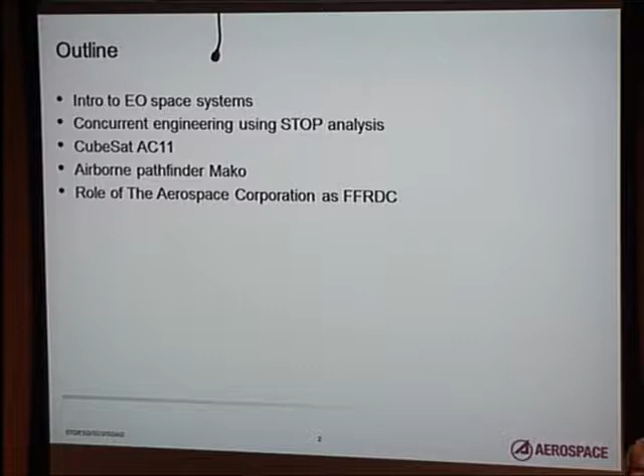And so quite a few charts. I had warned Dr. Hart that I have 51 charts. Some will be more dense than others. They're more for reference if people are reading along as they're listening to me. So feel free to ask me questions throughout the presentation.

So today I will be covering what it means to have EO space systems, what are those things that we're worried about as engineers in optical design, and then I'll go over the concurrent engineering environment and using something called STOP analysis, which is structural thermal optical performance. I'll go into CubeSat design of a system we're doing at Aerospace called AC-11, and I know people have heard that that's the new trend, trying to do smaller satellites and be able to test technologies earlier on, to then bit them into Class A satellites. And then we'll also talk about airborne pathfinders.

In addition to using a CubeSat platform, one can learn a lot about future technology and interesting optical advances using airborne systems, and we'll go over some of those principles associated with that. And then finally, based on the request from Dr. Hart as part of the colloquium to expand what one could do in a career, I'm going to talk a little bit about what it's like to be part of a federally funded research and development center. It's not always a common term people know about or a possible career opportunity, so I wanted to speak a little bit about that at the end.

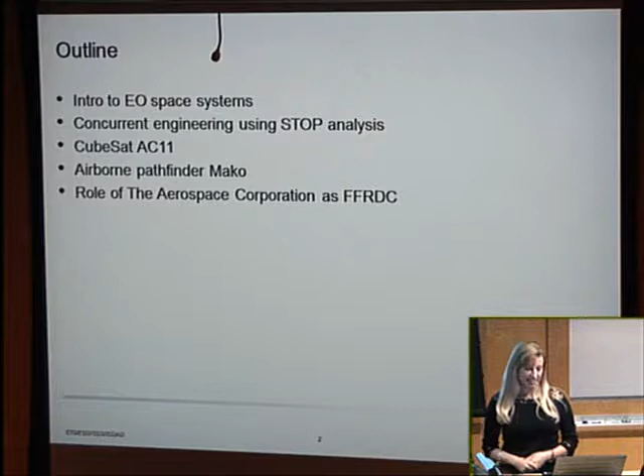So in terms of the role of an engineer, an optical engineer in EO systems, it's changing a little bit. When you leave school and go forward into the real world, there's a lot you have to worry about when it comes to a space system. It's a little bit more complicated, more things to be concerned about. So as you see here, we have to work in more interdisciplinary ways. It's more than just optical design. We have to look at integrating and testing a system for space, and I'll go into what that is all about. And also, the space optical system design process itself has become less stovepiped.

Traditionally, early on, when space became one of the things we were reaching for in the early 60s, things were relatively stovepiped. So an optical engineer would design something, pass it to the mechanical engineer, and then that would go on to thermal analysis. But now, things are becoming more collaborative, and the responsibilities are blending a little bit more.

So optical designers need to see the big picture to know that the choices we're making for a design will not negatively impact other areas of a system. Part of what I look for when I work with a team is, can that optical engineer be knowledgeable in other disciplines, at least know what not to do? Maybe not necessarily how to solve the problem, but some of those red flags so we can successfully make good choices for the other design engineers on our team.

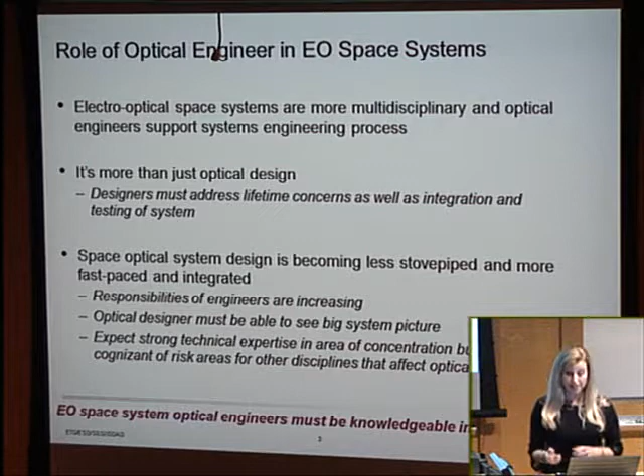So space. We hear about it, and if we don't work it all the time, we don't know what the concerns are. We see beautiful radiation belts, and lots of things happen up there to our systems. So we need to, for example, worry about the longevity of the materials we choose. Is there degradation in the performance? Those are the things we consider as designers.

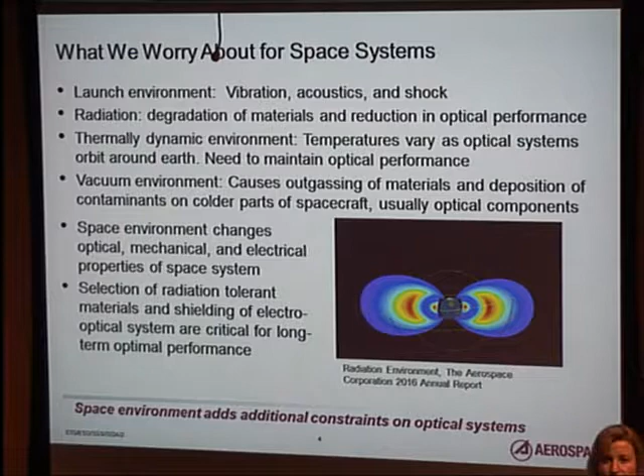But in addition, it's once we're up there, but we have to get there first. So the launch environment can be very detrimental to systems. So when we are on Earth, we test those systems in integration and testing, where we model the vibration, acoustics, and shock environments that these systems are going to experience before going on orbit.

Now, radiation, that's the part that causes some problems for our optics, especially if there's darkening, or if the materials that are enveloping the spacecraft start degrading, then the thermal effects could start affecting performance as well.

So the thermally dynamic environment, as this particular satellite or other object is going through orbit, you're going to see a lot of temperature cycling. And so then, depending on when imaging is taking place or what the mission of this particular system is, you're going to have to be able to maintain that optical performance in this dynamic environment. That's where part of this concurrent engineering helps to resolve some of those challenges of working with various disciplines.

Again, the selection of materials that are radiation tolerant and the shielding will enable us to design optical systems that have a longer lifetime. And the whole point here is that space just adds additional constraints on what we need to do.

So traditional systems engineering is an aspect of pretty much everybody inside of industry. We have this classic systems engineering V, which tells you about the life cycle of a system. We'll be going through on the left side, looking at requirements, understanding what is the goal of our system, and then as we go up, the upper part of the V is where we're starting to build and verify that what we designed will actually perform on orbit. So this is what we would term the systems engineering V.

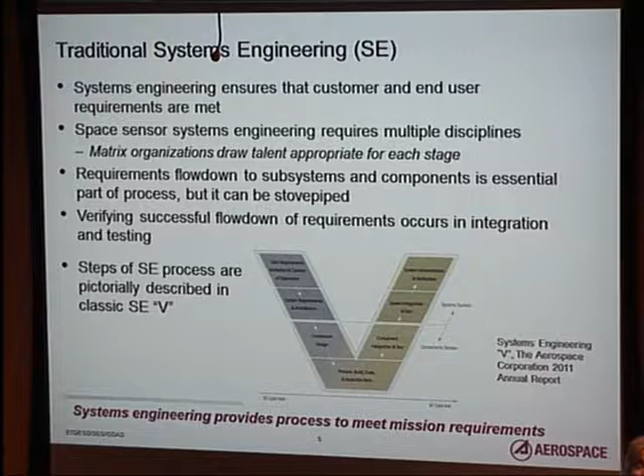And because of this, the requirements in general have to be across the system, and sometimes they are stovepiped, but as things are trending now, we're really trying to make sure that the requirements are more complementary to each other. And again, we verify that successful flow down of requirements in integration and testing.

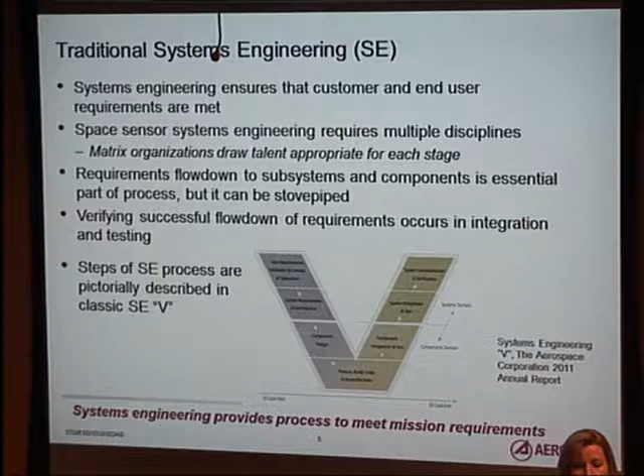So now there's something new happening. It's a trend that's occurring within the aerospace industry, not Aerospace Corporation only, but the industry itself. And this is actually a very positive change where it is now becoming concurrent engineering. And here we look at the mission performance, and at the same time we're able to model on a platform what all of the different parameters from the different disciplines working together.

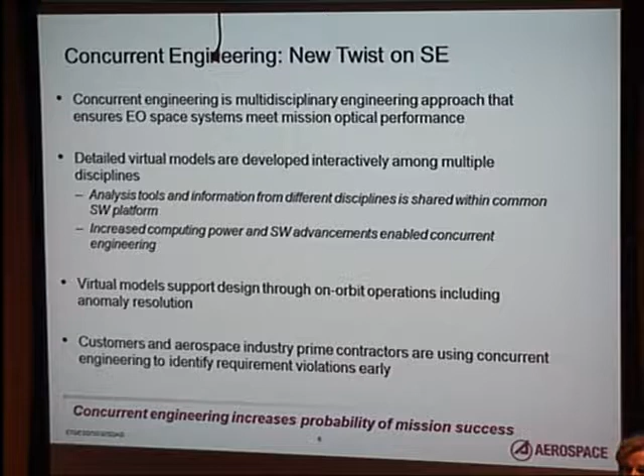So we have engineers working in their very familiar softwares, for example, CODE V and Nastran, Thermal Desktop, passing parameters on a platform that, in our case, is a software called Comet. There are many others commercially available and also ones that people develop in-house. This allows us to share this information and evaluate that performance before anything even goes into testing. And this is really only now possible because of computing power and software advancements.

These virtual models become an important tool because in previous times, we'd have an engineering model that we would build with some critical components, and then the full flight model. If there were problems in testing, one would only be able to use this engineering model, which had approximations of performance, or maybe not the same components but close enough. We'd have to do anomaly resolution with a system that wasn't the perfect one we're actually putting on orbit or currently testing.

By having these virtual models, you have the identical component outline and layout of the CAD and all of those performance characteristics in this concurrent engineering environment, where you're able to actually simulate what you're seeing in a test or even on orbit when there's a problem. So it's a really great opportunity to know your system really well and be able to evaluate it.

So this is a great strength because we're able to decipher problems much faster. As I said, as an industry as a whole, we're seeing a lot of contractors moving towards this type of design.

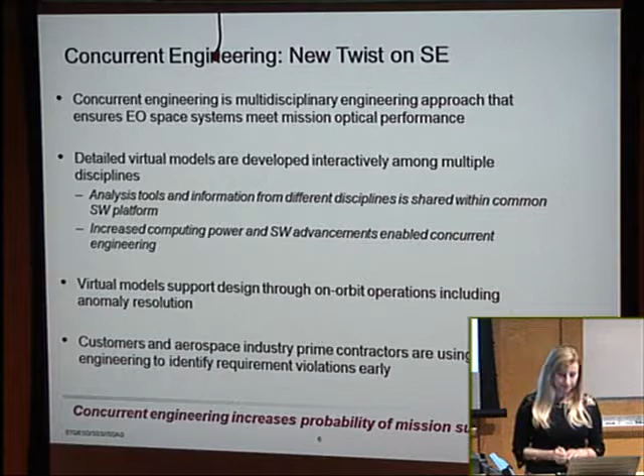So in terms of integration and test that I mentioned before, the point of it is to verify and simulate the environment that this particular system would see through the launch to on-orbit performance.

So we have thermal ovens to bake out contaminants prior to integration of these particular components. We're also able to do optical testing pre- and post-environments, and depending on the value of the asset, we're sometimes able to do this type of optical evaluation within a thermal vacuum chamber.

But the goal of all of this is to also exercise all the critical deployments of a system. So as we list here, solar arrays, optical covers, telescope booms - all of these things are evaluated to make sure that they perform properly.

And of course, the thermal vacuum environment creates the ability to test any outgassing or any kind of darkening that might happen on an optical system. Vibration tables, of course, simulate the launch environment. And shock, which is critical also, is that separation from the launch vehicle.

And the whole goal here is that the integration and test process should be catching those problems before we're on orbit.

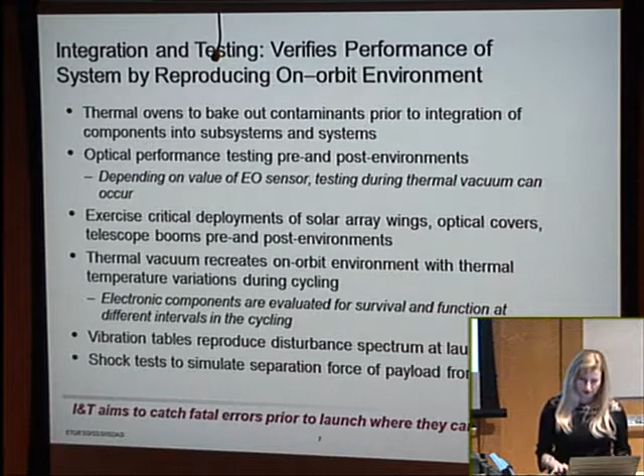So now I'll talk a little bit more about this structural thermal optical performance. STOP modeling, again, is more of the as-built, detailed representation of the hardware. And the goal is to really look at that optical performance change due to effects on the structure and the thermal components.

And again, this is an opportunity for engineers to work together in the same room and pass information not just through the databases that exist, but also be able to be close by to discuss the issues and find ways to make sure that those requirements actually close.

So what's really great about this is that we're actually learning from each other, and so our optical experts can learn more about the mechanical concerns. So the next time we design something, we're a little bit smarter and we're able to be more effective in how we create our designs.

And one benefit also about this is that we're able to follow a sensor throughout its development. We're able to evaluate a quick schematic and a quick design. We're able to analyze and validate any existing design changes. And then, of course, predict any on-orbit performance problems.

And once something is on orbit, we're able to even assist in anomaly resolution. So again, the STOP modeling is something that is able to support a system throughout its lifetime.

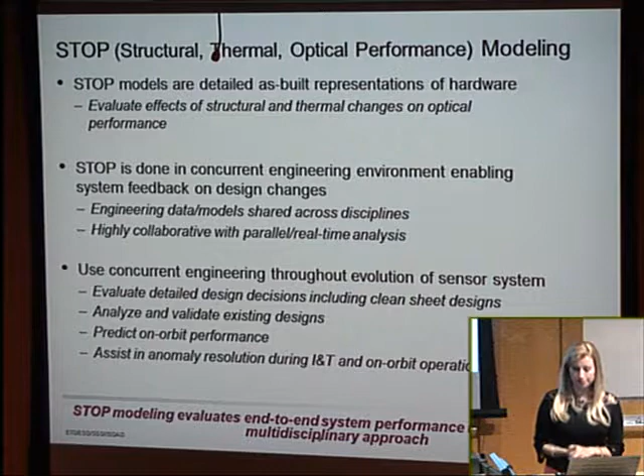Lots of stuff here, but again, it's an iterative model. As I mentioned, people would work in a Code V or Thermal Desktop, and we create meshes and ways to represent and put onto this CAD, for example, the information that's relevant for the system performance.

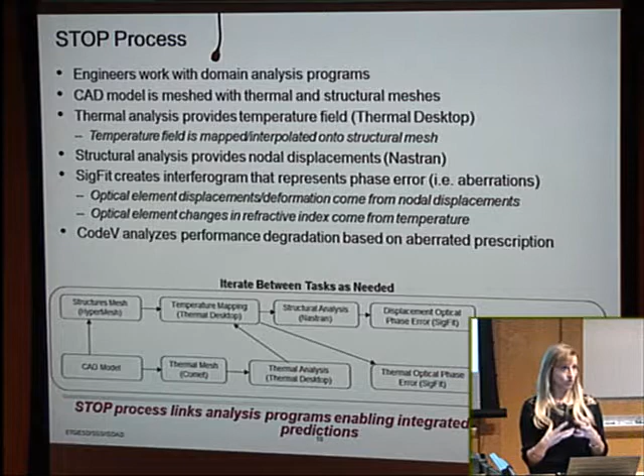And as we're growing this model and as the design changes occur, we're able to augment the model and improve it. And then we just go through and are able to do predictions on the optical performance.

So the purpose of STOP analysis for the Aerospace Corporation is a little bit different than maybe at a standard contractor. The reason for this is that our job as a federally funded research and development center is to be the technical advisor to the particular customer paying for the work.

So our job is to actually be able to provide feedback on the status of a contract, areas of risk. So we perform independent analysis of a contractor design. We support preliminary design reviews and critical design reviews, where we provide feedback on what is necessary to change so that the design closes and meets end user performance requirements.

And then also, as things are developing at a contractor, from a CDR to actually cutting metal and creating the optical component, we're able to support factory testing. And again, part of that is the anomaly resolution portion.

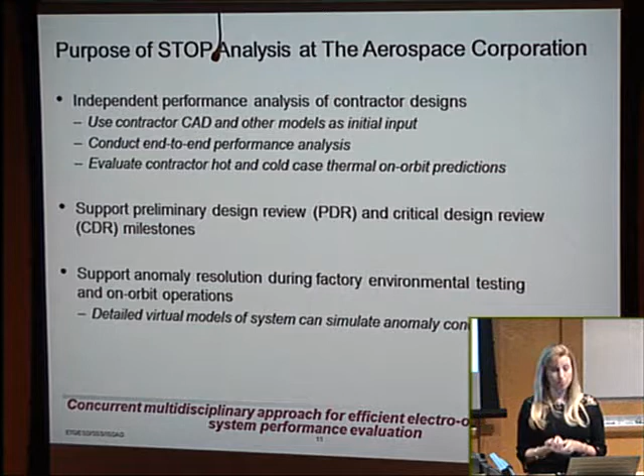This is the life cycle of a system. We have the pre-conceptual design phase, preliminary design, and final design and build and test. We've supported all the blue areas, but not flight anomaly resolution yet, which is actually good right now since that's based on a lens focus anomaly resolution I'll discuss shortly. We came up with an anomaly resolution plan that's working successfully. But if there were other complications with this system, we'd be able to assist in improving performance.

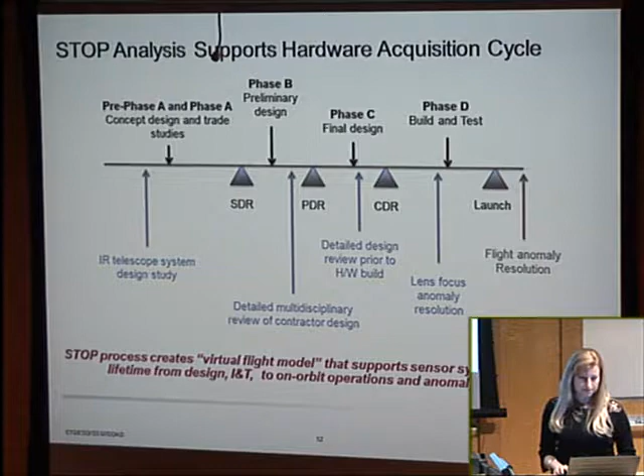This is a virtual flight model, which is what STOP analysis allows us to have. This first example shows a quick analysis of a design to see what area of risk we'd identify, and what could be the biggest problem for this particular telescope.

As we went through, we noticed there was a need for a sunshade based on thermal performance, and expansion from the titanium mounting ring and primary mirror. We were able to locate, as this person was developing the design, that the highest area of risk was in that particular region. This was a much less complicated system than we normally model, but it was an initial design, and we could tell the customer where to look and what to redesign. It was a short duration study, but it provided high value information that may not have been found in a stovepiped process for designing an optical system.

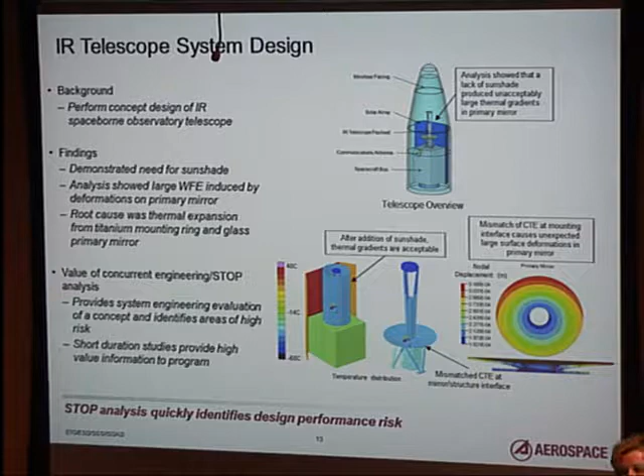The next example is more complicated because it's an actual flight system in thermal vacuum. The performance showed a large gradient across the system that was not expected. We took the models we had and simulated the results happening in thermal vacuum, so we could set up the conditions that would result in such a thermal distribution.

It turned out the heater design was not implemented properly on this sensor, and it was too small to equally heat the large front end of the system and the back end. But we were able to come up with a thermal control loop that would upload thermal values to help control the system.

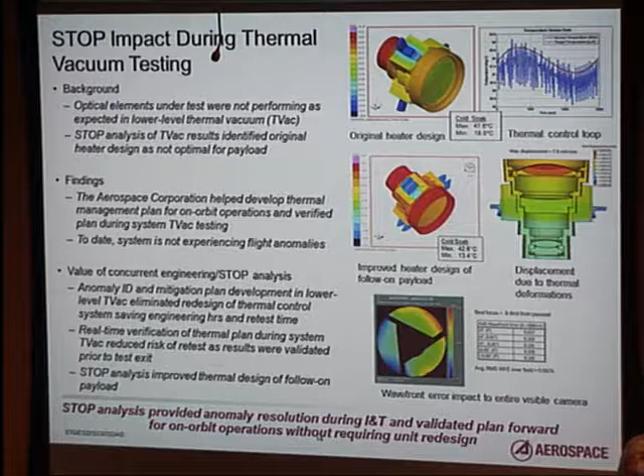The good news was they were able to continue and meet their schedule, because unfortunately in the real world we're not always able to do the ideal solution. We may have a launch date and have to go, so we come up with something workable. We helped them meet schedule without pulling out for thermal vacuum testing, which is very expensive, especially with a standing army of engineers. At the same time, we were able to help improve the next generation of the sensor. Everything being iterative in engineering, we made an impact on the immediate system and improved future systems. This was one of our big show-stopping moments.

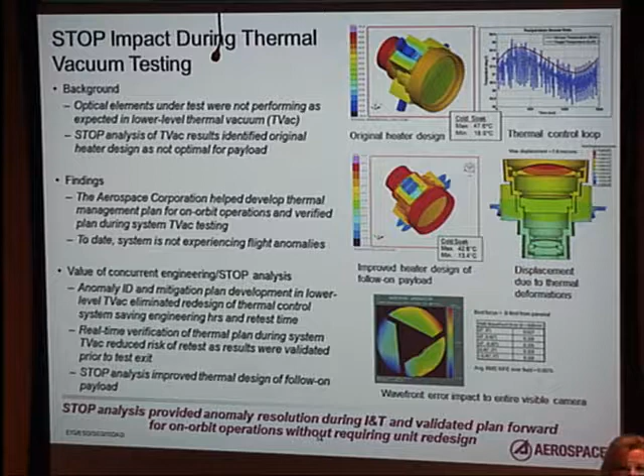We do have other examples, but they're on other topics, so we will not go over those.

Next, I'd like to talk a little about CubeSats. CubeSats are becoming more popular, as you know. They're a much less expensive way to access space. They also provide a great platform for university students to design experiments and systems that operate in space. Also, a lot of customers are considering breaking down Class A satellites into smaller ones, so we're able to break individual performance requirements into sub-satellites. This also helps because we could do redundancy a little bit easier.

If one part went out, we could send up another smaller satellite faster, because the timeline for a Class A satellite can be up to a decade from design to launch. So that's quite a while. Sometimes by the time you launch it, a lot of the components have already evolved further, but it's too late to include them in a next design. So CubeSats allow us to put the latest technology into space, verify how it works, and then include them into future systems. So they're able to support a disaggregation of a Class A satellite system, but also support improvements of technology for future Class A satellites.

So I sort of went over that here. Also, the benefit of a CubeSat is it is standardized. They are standardized in U units. As you see here, they're 10 centimeter by 10 centimeter by 10 centimeter. It allows people to be able to purchase inexpensive buses to support such systems. You can buy them online, or from vendors that sell CubeSat launches.

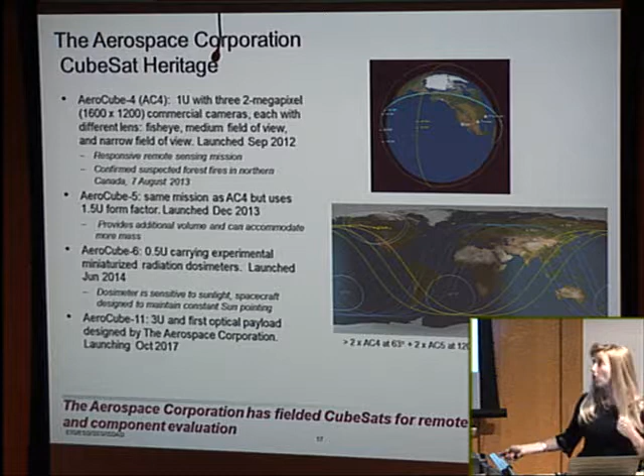So I would like to specifically talk about AeroCube 11. This is actually Aerospace's first optical payload on a CubeSat. We've done others, as you've seen, but they haven't been optical payloads we've designed. This is the first one.

So part of an optical engineer is to also be efficient with cost. One of the considerations we had was, well, if we're using a CubeSat, it's very common to use off-the-shelf components, commercial off-the-shelf, called COTS. So we wanted to investigate that.

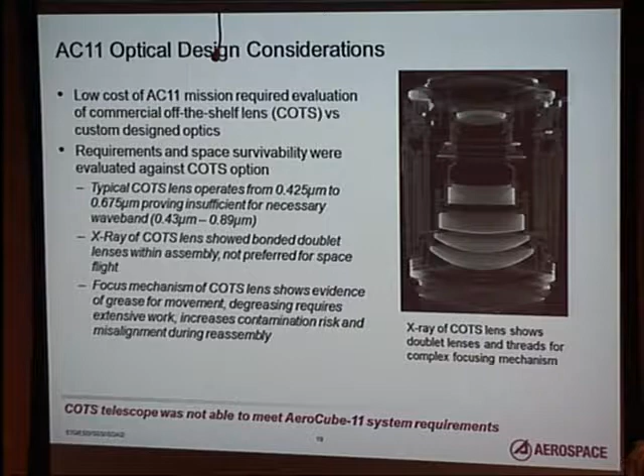So we decided the best way was for us to design our own custom lens. As a designer, though, there are many times where using commercial off-the-shelf systems are perfectly adequate. But in our case, after doing further investigation, this was not the case. So here we have our custom AC-11 payload.

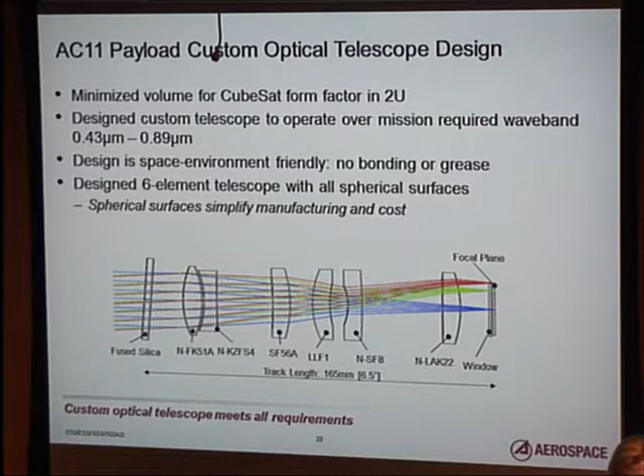We had to work to minimize and fit within the 2U format, based on the amount of space we had, so we were able to design our custom telescope to operate over the appropriate wavelengths. We made sure we did not require any grease or bonding to make the design work, and wanted to make sure it was inexpensive since this is a CubeSat meant to be quick to do. We used only spherical surfaces so manufacturing and costs would not be an issue. So this is the design that was produced.

We also had to make sure the telescope met optical performance. We had a requirement, and we actually ended up having 4 times margin within our performance, so we were happy to see that.

Even though you have margin, once you build, things happen. There are different requirements and tolerancing that, as much as you design it in, doesn't always equate to when you actually build it, because when people make the lenses, some things may not perfectly align. So we ended up having 2.5 times margin, and that's still very good, so we were very happy with that.

Our MTF was perfectly within requirements as well. The important thing to think about is that margin is your friend, because if you don't have it, errors will just continually stack up and eat into your margin. So it was actually very wise for my designer to build it with more than we needed, knowing full well it would probably drop.

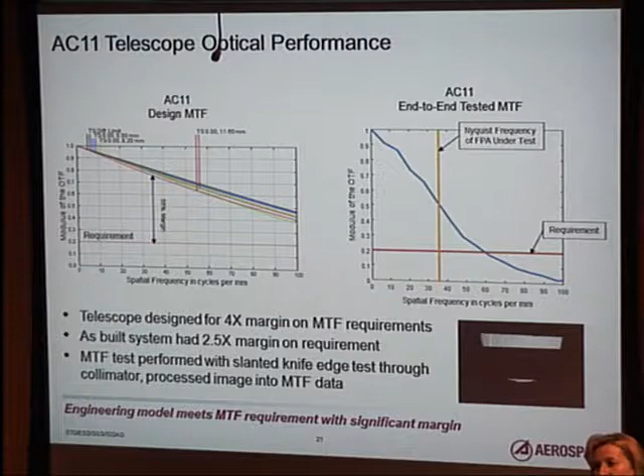In terms of the optical payload mechanical mounting, the mechanical part is the fact that we have to be able to put everything together in the 2U space. We have to be very effective in how we assemble so it's not difficult. We also have to make sure it carries enough of the structural integrity for when we launch, and we were able to make sure it met the thermal and vibrational requirements.

The person from my department who was the optical payload lead had to spend quite a bit of time working with the mechanical and thermal people on the CubeSat side to make sure he understood what was feasible and what would be necessary so we would be able to meet the performance.

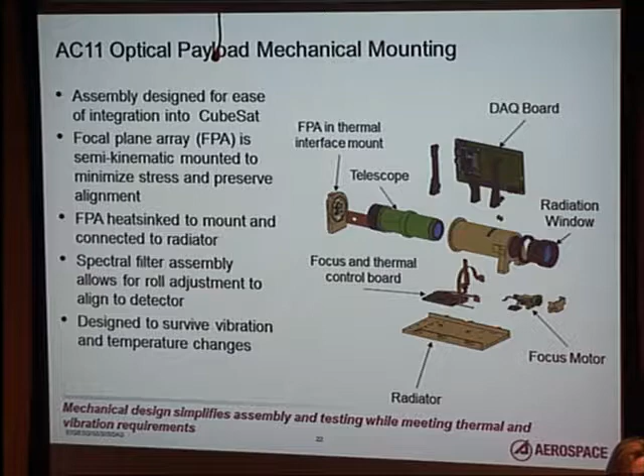As you see here, we had to have a radiator so we would be able to maintain that thermal performance and therefore our optical performance on orbit. We also had to have that heat sink. The spectral filter itself had to have enough adjustment so we would be able to keep things in focus and image properly. So we designed it so we were able to survive vibration and temperature changes.

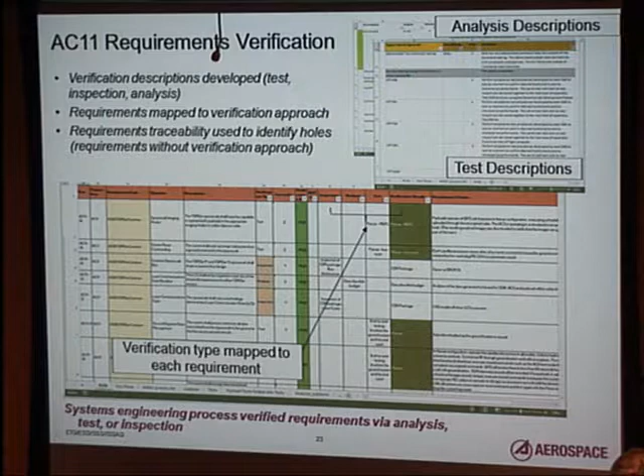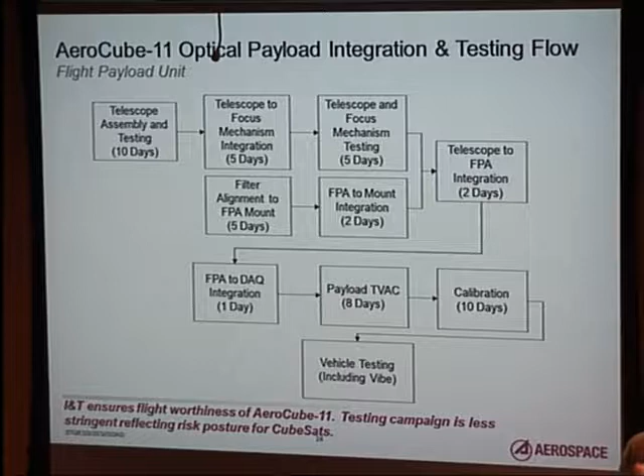Now, integration and testing. This is for the flight payload unit only; there's other testing that occurs at the bus level. When we have a large satellite, we obviously have different missions. One satellite can do multiple things, so we may have an imaging mission or a sounding mission on a large spacecraft, but each of those individual instruments has to go through the integration and test process.

And then once those are integrated, the bus itself, before it has payloads integrated, goes through the integration and test process. And then when the entire assembly, the whole space vehicle, is integrated, it too goes through environments.

Depending on the cost of the program and the risk the customer is willing to accept, there will be either a lot of testing or a reduction. This testing campaign is less stringent because it's a CubeSat. Given the cost and timeline, we were willing to accept a little more risk on the payload because it's a demonstrator, and we would learn from it. So we created a testing campaign that's a lot shorter on the payload.

So we would test the telescope assembly and look at the focus mechanism, because we have to maintain focus while in a thermally changing environment on orbit. We were doing mechanism testing, and we obviously want to check all of the mounts.

From there we would integrate everything and do payload thermal vacuum testing. Afterwards we take that out and do calibration on the system to make sure what we did beforehand still matches what we're seeing now. Then, of course, we would do a vehicle testing integration campaign once that payload is delivered to the bus team. This bus is very small, but it's a big moment when we deliver a fully tested payload to the bus team.

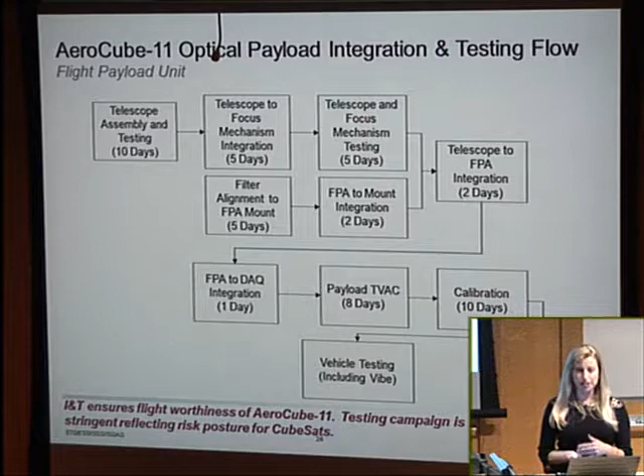So again, integration and test ensures the flight worthiness of the program. The great thing about CubeSats is they give students the opportunity to understand what an integration and testing campaign entails. But the same principles apply for larger satellites that can only accept a small amount of risk. So I wanted to show some data from the vibration testing.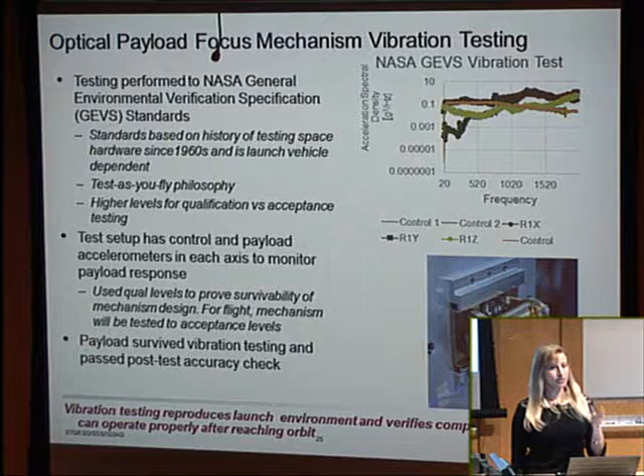In addition to having a very specific integration and test plan, you have to work against standards. The Air Force has testing standards and NASA has testing standards. For this case, we chose the NASA GEVS program. These are based on historical records of the types of tests required based on 1960s launch vehicle flights. The philosophy here is test as you fly, meaning you want to replicate the expected on-orbit or launch environment on your parts to ensure they will survive.

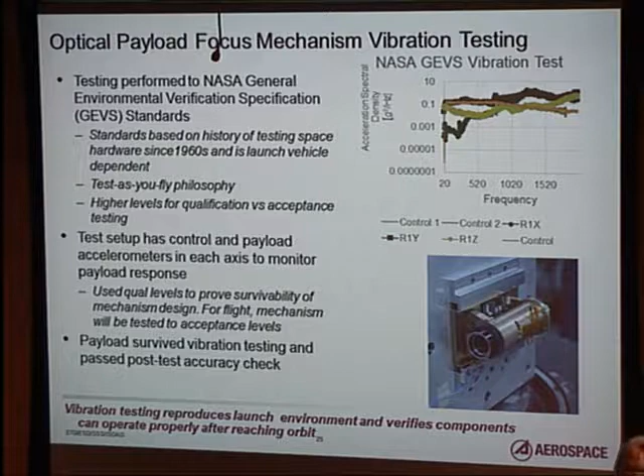The setup has control and payload accelerometers on each axis. We made sure we looked at the data to confirm the payload survived vibration testing and passed the post-test accuracy check. So again, we want to simulate the environments and verify pre- and post-performance.

That's because we need to keep the optical boresight facing the Earth—because we do enjoy stars, but our mission is to look at the Earth. So one of the things we had to ensure was that our reaction wheels were appropriate and that we set up the CONOPS, because we don't just send something into space and hope it works well. We have to plan everything out, and that includes all the data we're going to transfer down, which I'll talk about in the next slide.

As we determine our orbits, this provides feedback to our thermal team, which allows us to know exactly what we need for our materials to ensure performance is maintained. The takeaway here is that we want to make sure we point the optical boresight at the Earth, keep our focal plane array cool—otherwise the performance degrades—and also make sure our spacecraft is powered so our solar arrays face the sun as much as possible.

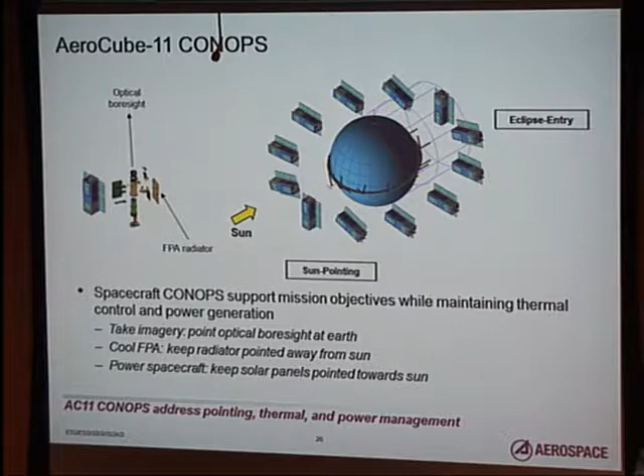So, yes, very complicated. I know. But this is what it takes to be able to understand when we're going to be downloading the imagery we collect, or when we do image collects.

So again, we would have some places where we always want to be able to check our position. In some cases, we're simply collecting information from the GPS satellite system to know where we are. In our case, we're going to do 7 collects.

As you see, the more you get to the broader perspective of the mission, the larger the team becomes that you work with. So instead of just thinking, 'I'm only working on my payload team,' now I have to work with the launch vehicle provider. I now need to look at the ground systems. Sometimes you have to make sure you have the right electronics to communicate with the ground system, the right protocols. And if you miss that step, you may be orbiting, but you may not be able to get your data down as efficiently.

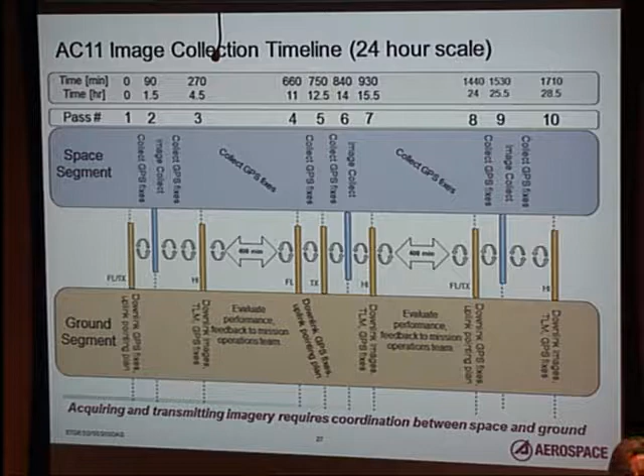So those are some of the things you have to think of. As systems engineers, they are the ones that look at the whole picture and decide where one does a collect, where one downloads data. So it's a very big problem to step away from just the optical design of the telescope, which we certainly want done well, to actually supporting the entire mission and the objective.

Here I just have a quick little map of the ground stations that we have, actually 4, including Hawaii, that collect data, and we also have mission control right in our facility at Aerospace. It's at the Physical Sciences Laboratory portion, so we have a mission control there, and it's kind of fun to be able to check out what's going on.

And again, we want to be geographically separated so that we have other opportunities to download our data.

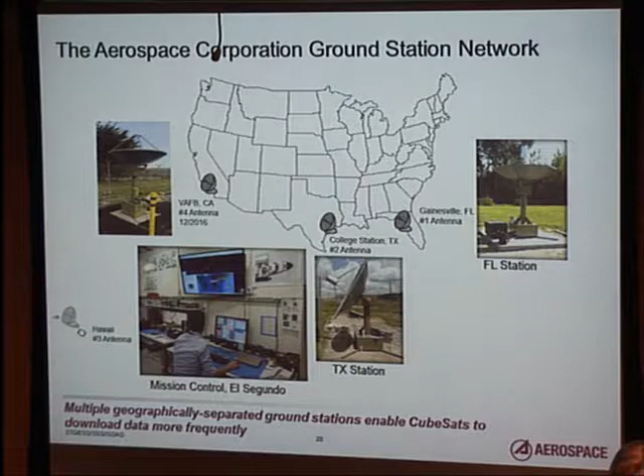Are there any questions? Chatting? Okay, all right, we're halfway through.

Hang in there. All right, so now I will talk about Mako, which is a long-wave infrared hyperspectral imaging system. This is a system that my subdivision had supported. This was a while back, prior to my arrival, but it has the same concepts of what my team is doing now as we're supporting airborne missions on polarimetry. I didn't have the data available to present, but I wanted to cover the information on the Mako.

So why are airborne systems of interest? In general, it's great to collect airborne data when we're looking at missions like fires, meteorological surveys, and similar things. But in our case, the reason we're also very interested in airborne systems is that it actually emulates the low Earth orbit imagery where a lot of our sensors reside for our primary customers.

The reason it's good is that it's able to basically simulate the GSD, or ground sample distance, using the same focal plane, and also have a similar velocity in terms of how we would be collecting data from a satellite system. So this particular elevation of about 11,000 feet and the speed of a Twin Otter allows us to collect this data. That's the reason we do favor the airborne system.

In addition, as we're developing technology that's cutting edge and not quite ready to insert into a Class A satellite, it allows us to do testing and bring the system back. So we can do some faster design work, take on a little bit more risk because the system does come back and we can make upgrades. The more risk you can take on, the faster you integrate technology, the faster you can try something out. But once it's in space, it becomes a little bit more complicated.

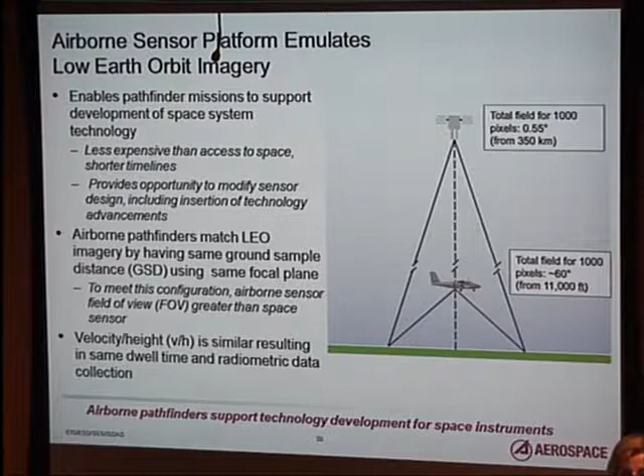So that is the reason we also like to do airborne systems. Why do we want hyperspectral sensors? Well, they are very useful in imaging and getting information about gaseous emissions from compact sources. This allows us to look at industrial urban environments and see what's going on.

In addition to helping develop things for imaging for military missions, this is a great opportunity to help with the environment. One of our other systems helped when 9/11 occurred. We had some flights evaluating what was happening from the 9/11 towers. So again, we are able to do something for the environment.

Again, with the survey of fugitive emissions, you're able to provide information to first responders, and you're able to inform which communities need to be evacuated. So it really does help out in that regard, and it helps reduce the liability of exposure.

When we start doing these types of missions, we start really partnering with an even broader community, because you're looking at not only the scientific community, but the first responders, and political situations in the cities and states, and how can we help them. So it becomes a much larger, complex problem. At that point the imager is formed, but then how do we manage our resources so we're able to help out?

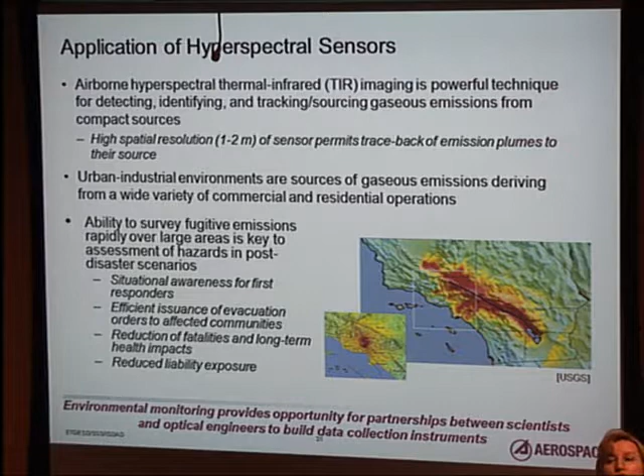So I would like to talk a little bit more about Mako. It is a whisk broom scanner, which means the sensor actually collects information by basically whisking side to side, back and forth. It was built in 2008, but it was flown in 2010.

This was our original SEBASS, our original system. Then, based on development of new focal planes and the availability of technology, we're able to really expand how much our system is able to correct and collect information.

And again, the good thing is that this is high sensitivity mode. We're able to have noise reduction because we're using longer integration time. So within a span of a few years, we're making significant impact to the way we're collecting the data.

So in terms of going back to the optical designer, how does it begin and what do we worry about? As in most cases, we start out with a schematic layout, and somebody says, 'I'd like to be able to do this, and I'd like to image this particular place and have these characteristics.'

So we had a schematic, and we wanted to make sure, because of the type of imaging we're doing, which is in the long wave, we need to have a cryogenic environment. We had a cryostat here, and we were making sure that this particular area is able to maintain the cold temperature required for optimal focal plane performance.

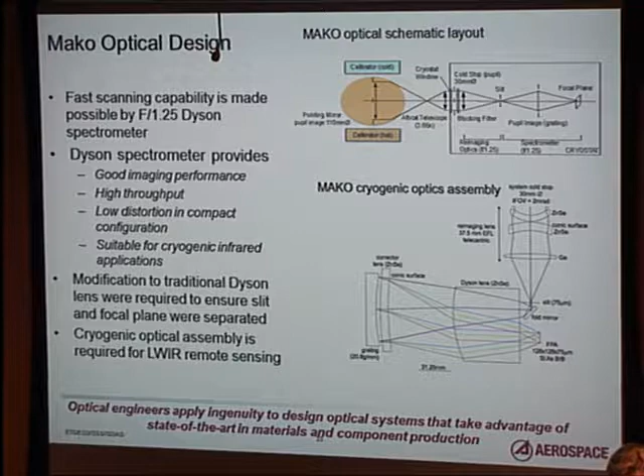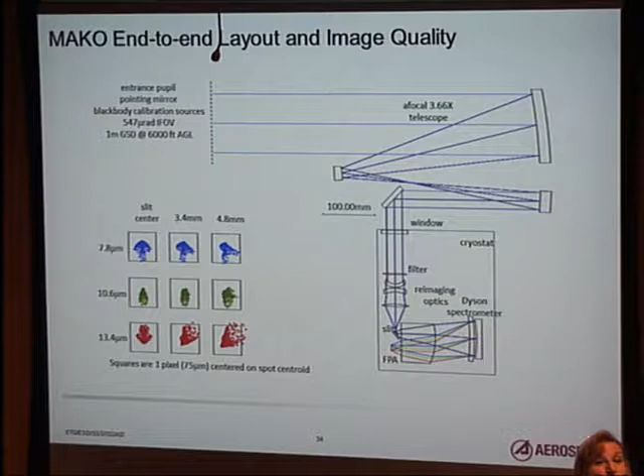So again, technology matching and then pushing the optical designer to be able to do more. Here is another end-to-end layout with the afocal telescope, and some spot diagrams. The whole goal is that when you design a Dyson, everything falls right on the back of that lens. But because we have to build a system that has a focal plane and is cooled, we have to change a little bit about the Dyson to get that extra room to put a detector.

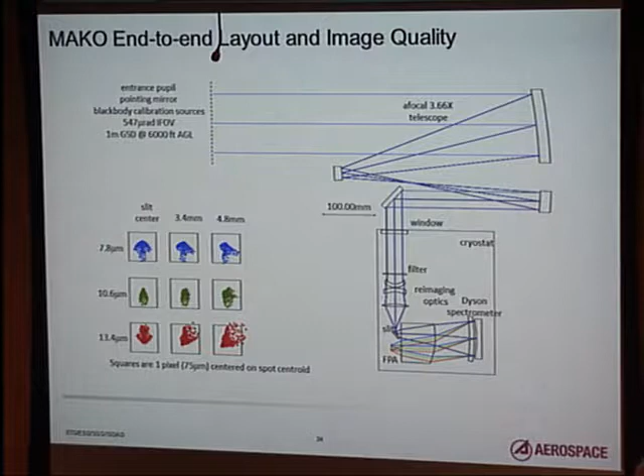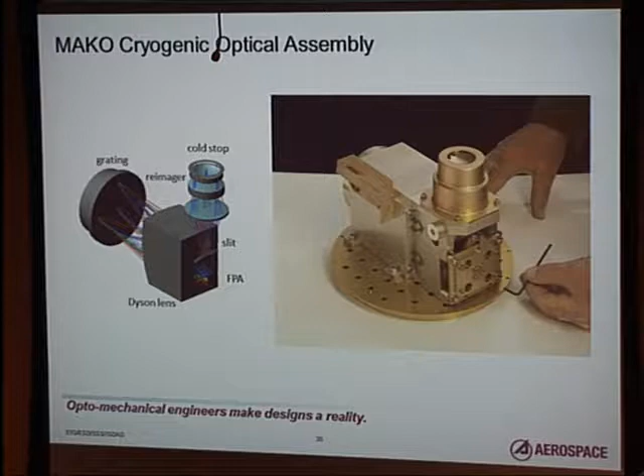Here is the as-rendered SolidWorks model of the cryogenic assembly itself. Working hand in hand with the mechanical engineers and optomechanical experts, we're able to create this design. Now, one might ask, why is it so shiny? Well, in the long wave, this coating, iridited aluminum, appears black, so it wouldn't interfere or cause stray light issues. Again, a hand-in-hand team of the optical designer and optomechanical engineer make it possible. This is actually part of the cooling, with all these holes and this plate structure to help cool the system.

So again, as designed and then as implemented, you see here a lot of components. Because we have this mechanical motion, we had to perform clearance checks to verify that as this mirror is scanning, it doesn't hit any of the rails on this particular cart. These rails are important because we match them to the rails that will be on the aircraft, so that when we put this system in, we don't have any problems. We simulated the cart and made sure it was the same distance.

We took a Twin Otter plane and modified it so we could put a payload in. We took some seats out and added a payload stand. In the lab, this simulates the setup to make sure we can do all the required testing before implementing it into the airplane, avoiding collection challenges. We also have an inertially stabilized mount, and this is the scan mirror we're checking for clearance issues. This is a collaboration between optical, mechanical, and electrical engineers so we can go collect that flight data.

This is the installation of the Mako into the actual plane. The track of the cart matches the seat rails so we're able to install it very quickly. This matters because airplane hours and pilot hours are expensive, and we don't want to waste time integrating the system when we want to be up in the air collecting data. We want to be as efficient as possible with daylight and staff time because these are really long days. To do a collect throughout the day, I participated in one a couple years ago.

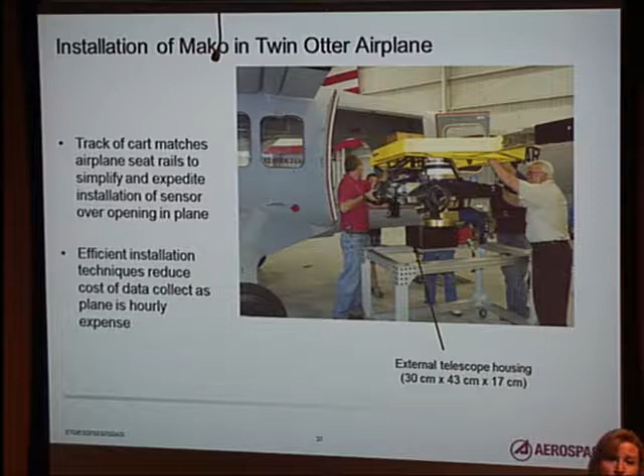It's an early morning. You make sure the plane is ready, do the plane checkout, get the instrument in, and then go fly around. We were flying around the LA area, and it just takes time, and you want to make sure you don't have bad weather. So we try to be as efficient as possible with the installation so we can focus on the science.

So, another busy chart, but again showing that as much as we love the optical design, we love the software engineers even more, because they're the ones that allow us to take the data and make sure it's collected properly when we're on the airplane. There are a couple things with this particular software collect: we also have to provide the flight plan to the airplane pilot. We tell them what we want to do, but we also have to put that into the computer system.

So we have a flight plan, which I'll show in the next chart. At the same time, we have to make sure that as we're traveling and collecting data, everything works well so that we store the data properly, putting it into additional disks and additional space because we're collecting a lot of information over the course of a 4-hour flight.

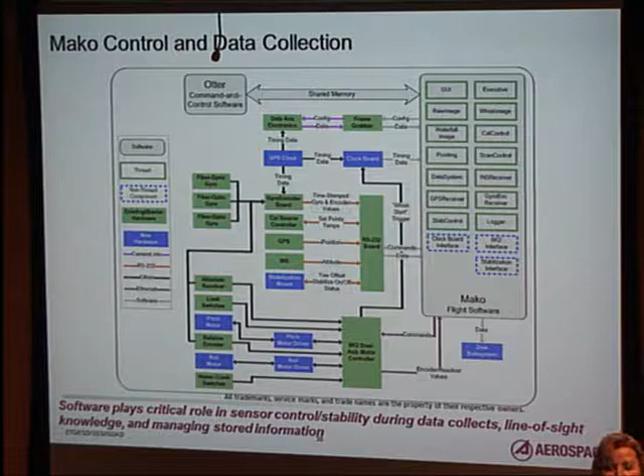So all of this has to work together, and we have to be managing the stored information. We also need to maintain line of sight, because when we have a flight plan, we're looking for something particular with the data we're collecting. We want to make sure we're on that flight plan, getting the data, and that it's properly registered with where we're looking. So we need to know where we're looking in addition to just collecting it.

So data analysts, once they get this data, do a lot of processing on it to extract critical information. It's amazing how it's a very large group of people involved. The analysts are excited to get this data, but they maybe don't even realize how much work went into getting it to them.

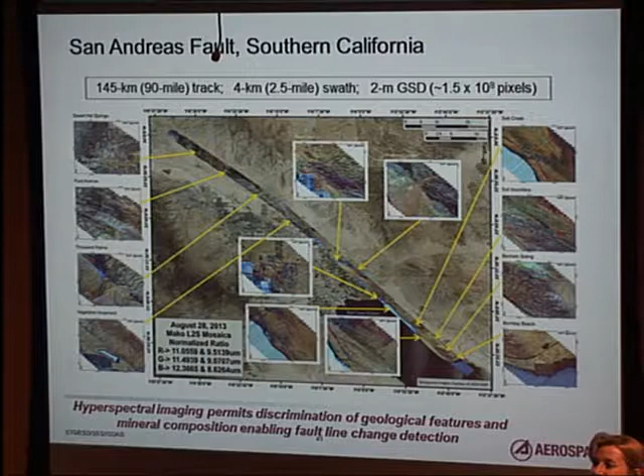Let me go back to that — don't want to say it wrong. Right there, let's see. Yep, 44 nanometers spectral resolution, 128 channels. So it's a pretty good system. We're now working on some polarimeters because that's also going to add additional information. We're always trying to data mine more information and use technology as it's coming up, seeing new ways to apply it.

What's the effect of atmosphere versus no atmosphere? The good news of working in the long wave is that you're not as affected because of water content. Water is obviously a problem, so we try to work in other bands, but it can block some of our imaging depending on the wave band. If you have a lot of cloud cover, that can be a problem, but in other wave bands it doesn't really matter. If you're doing a radar collect, that's great — you can see through clouds, so that's not a problem. It really depends, so we do have to sometimes watch out for weather.

Different question — how about the index of refraction of air versus the index of refraction of vacuum? Does that have any effect on the whole system? That's true, that's a good point. We do account for that a little bit, especially not only the vacuum but the fact that it's going to be thermally changing more on orbit. So we account for that, for example, in the concurrent engineering portion — we have to account for that because we try to simulate what is going on with the changes.

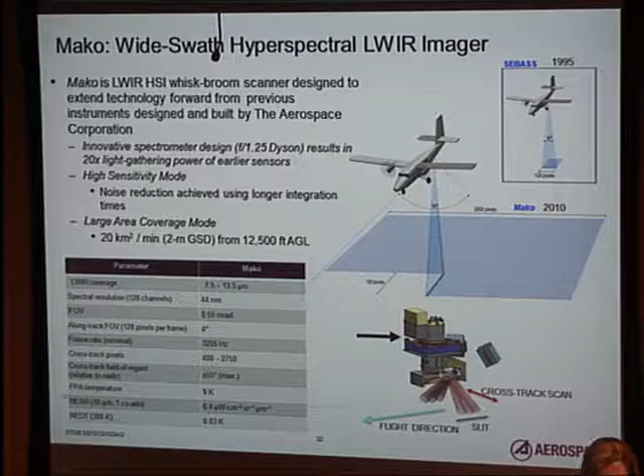All right, so I want to talk a little bit about FFRDC, that's a federally funded research and development center. So I want to talk a little bit about what it's like to be working in that environment versus at a contractor. The Aerospace Corporation operates a federally funded research and development center.

So we provide engineering and acquisition management support. You're like, what is acquisition management support? Well, that is all the work that is required when we build a spacecraft or another space asset where the government is actually purchasing a product from a contractor, and then they have to be able to execute that contract and deliver on what they've paid for. So that is what we are supporting when it talks about acquisition management.

And then also we do objective technical analyses and assessments. And because we are not connected to the contractor, we can do that independent analysis and make sure that they are going to meet their requirements, they're using the best products, or their testing will be on time. So those are the things that we are responsible for.

And we also do end-to-end involvement in space systems. So we do everything from, for example, initial designs for systems that are going to be built. So we will help the government put together a request for proposal. So if we know there's some up-and-coming technology that we feel is important to be inserted in a future system, we can help show the government how it's possible to put it in, and then the government will let out a contract, and then the contractors will bid on that, get selected, and start performing on that contract.

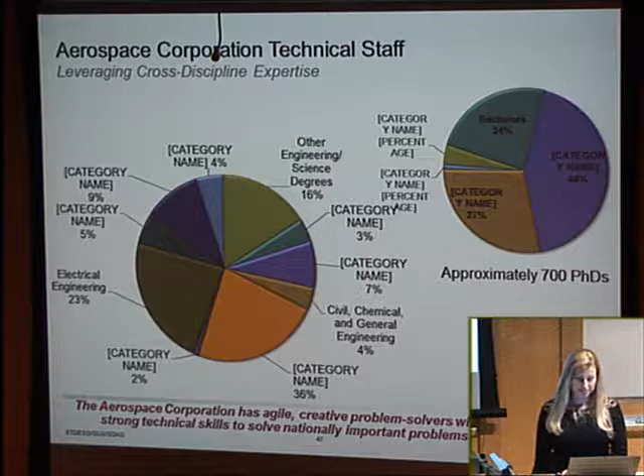In summary, I covered the challenges and processes associated with designing, building, and deploying EO systems. We talked about trends in the aerospace industry, like concurrent engineering and smaller platforms, whether CubeSats or airborne sensors, to develop future space technology, and discussed what it's like to work at an FFRDC and the research opportunities there. So, thank you.